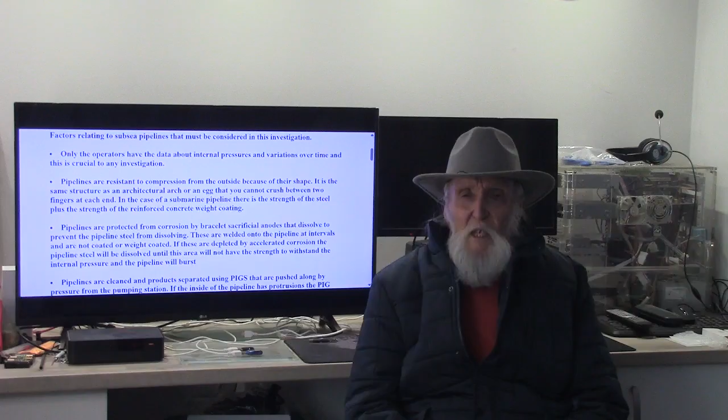Pipelines are resistant to compression from outside because of their shape. It is the same structure as an architectural arch or an egg that you cannot crush between two fingers at each end. In the case of a submarine pipeline, there is the strength of the steel plus the strength of the reinforced concrete weight coating.

Pipelines are protected from corrosion by bracelet sacrificial anodes that dissolve to prevent the pipeline steel from dissolving. These are welded onto the pipeline at intervals and are not coated or weight coated. If these are depleted by accelerated corrosion, the pipeline steel will be dissolved until this area will not have the strength to withstand the internal pressure and the pipeline will burst.

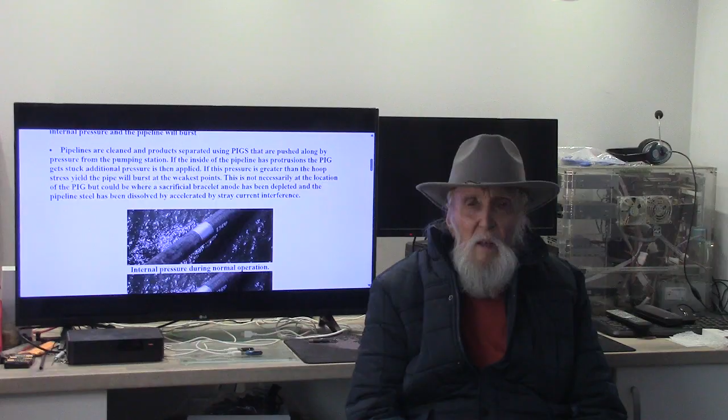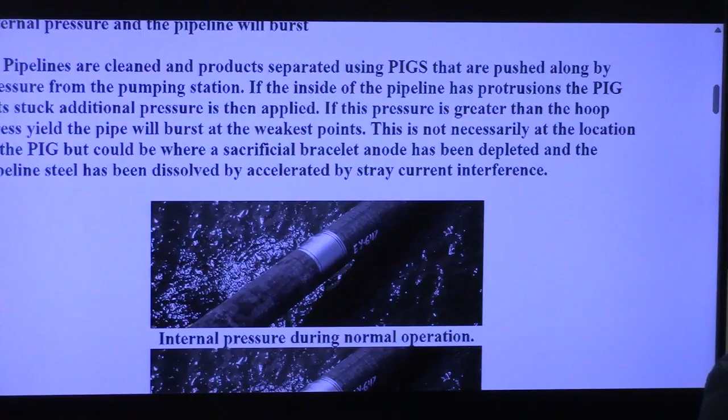Pipelines are cleaned and products separated using pigs that are pushed along by pressure from the pumping station. If the inside of the pipeline has protrusions, the pig gets stuck and additional pressure is then applied. If this pressure is greater than the hoop stress yield of the pipe, it will burst at the weakest points.

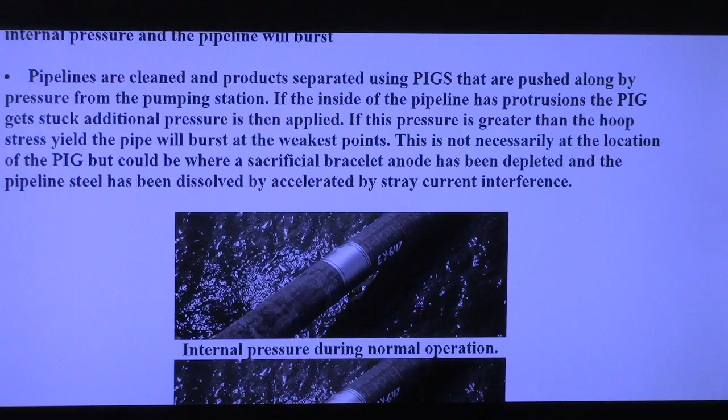This is not necessarily at the location of the pig, but could be where a sacrificial anode, bracelet anode, has been depleted and the pipeline steel has been dissolved by accelerated stray current interference. These pictures show the sequence of these events.

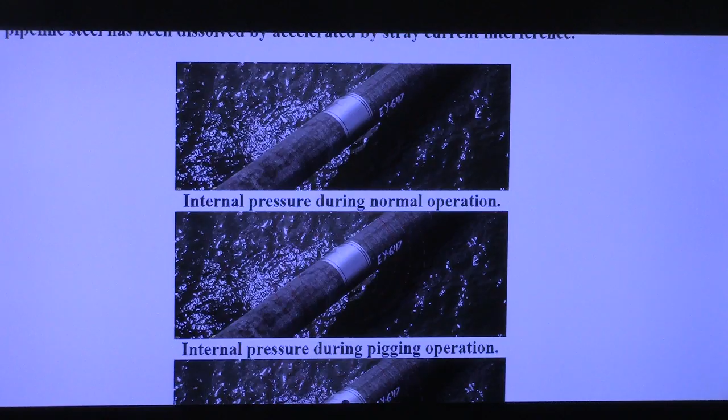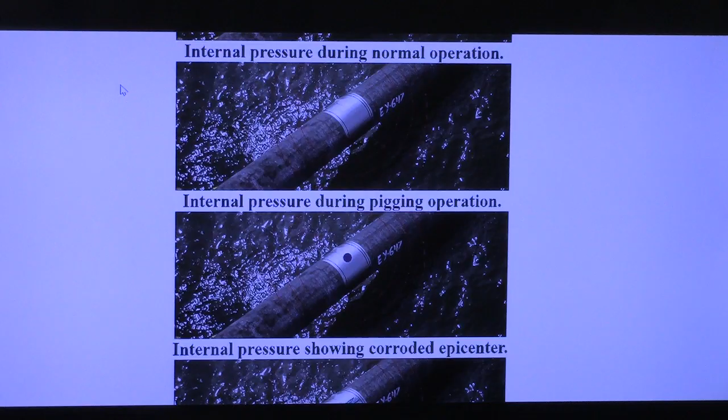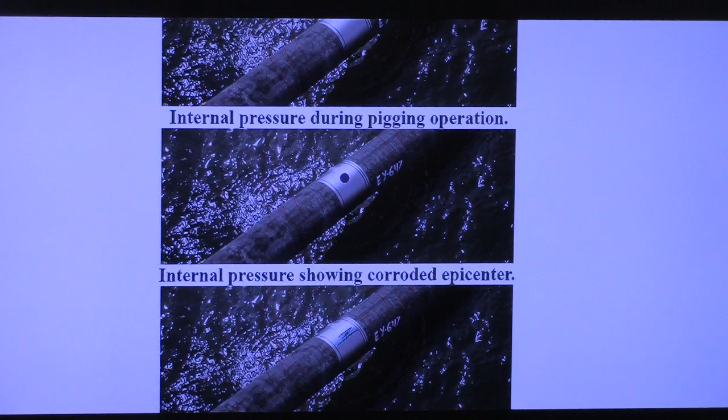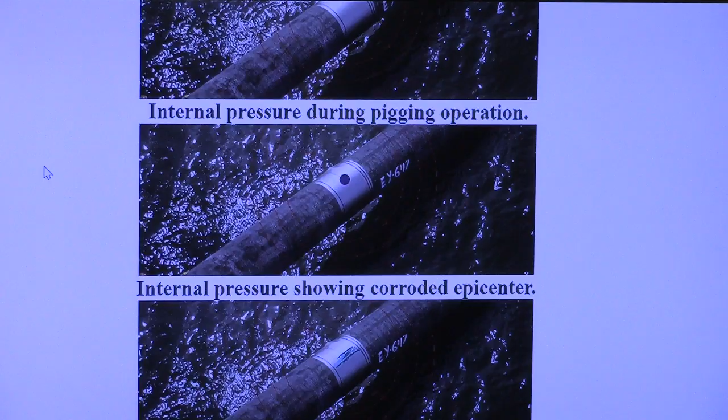The internal pressure during normal operation hasn't affected this particular picture. The internal pressure during normal operation is shown by the red rings, which show the amount of pressure. The internal pressure during a pigging operation is exerting more stress to the weakened part of the steel under the neoprene coating that you can see in the picture.

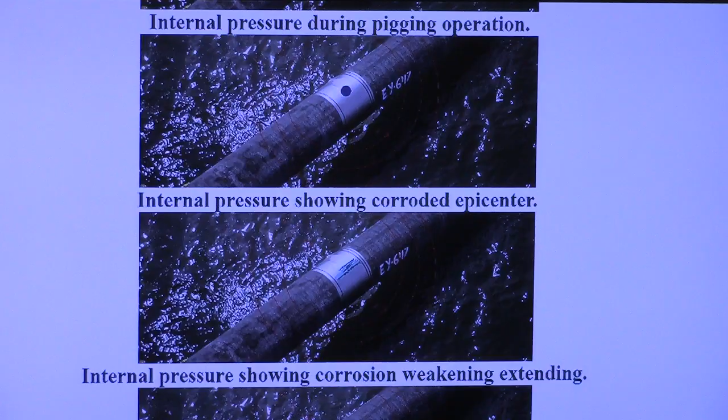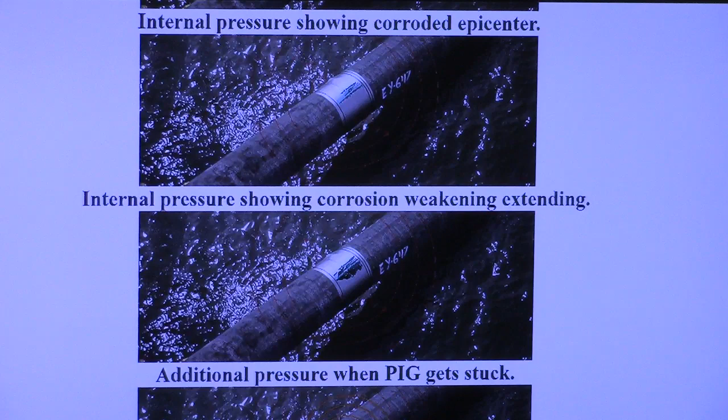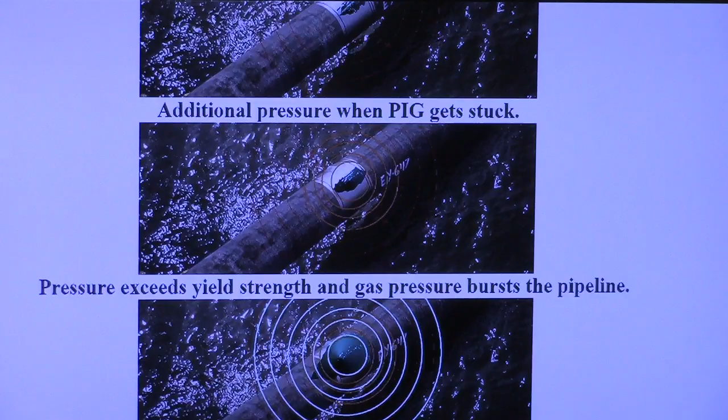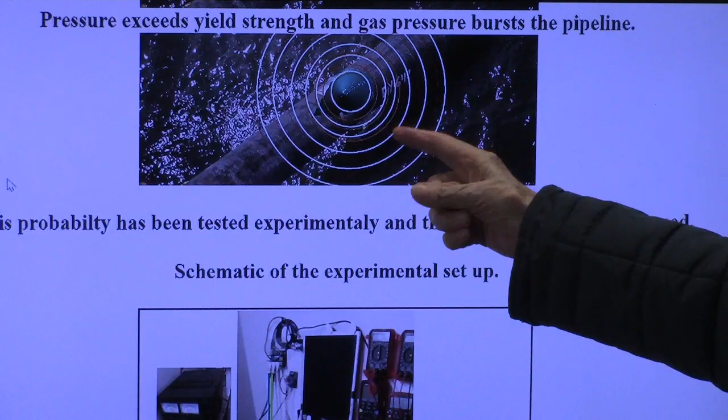Internal pressure showing corroded epicenter. And then the next picture, the internal pressure showing corrosion weakening, extending, so gradually the steel is stretching. Additional pressure when the pig gets stuck. And then the final one is the pressure exceeds the yield strength and the gas pressure bursts the pipeline. This is shown by these circles that I've actually photoshopped onto here.

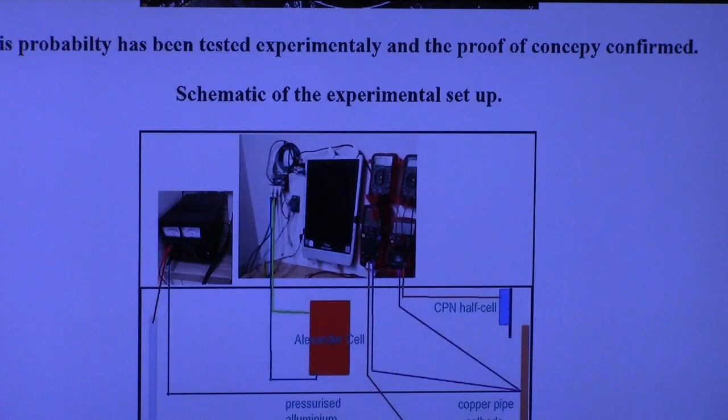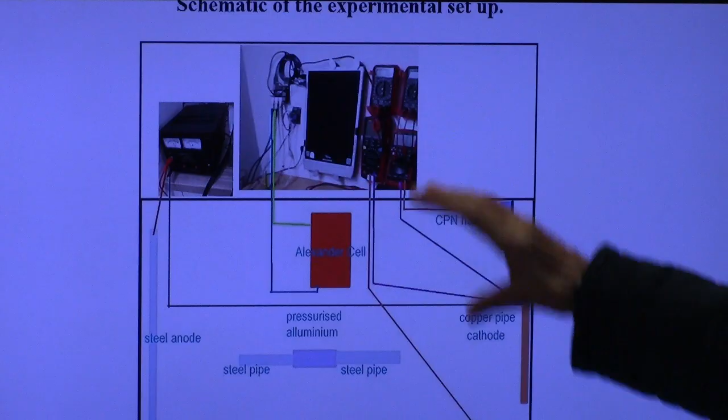This probability has been tested experimentally and the proof of concept confirmed. Here is a schematic of the experimental setup. We have the transformer rectifier, the instrumentations, and then the schematic of the layout of the experiment itself.

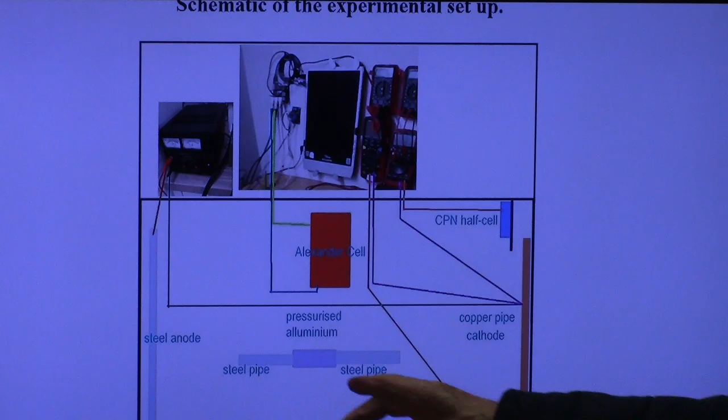There's a steel anode from which the charges are coming through the test piece with the steel pipe with the aluminium pressurised in the centre, and this is the copper cathode that I've inserted, and to prove the current flow, a steel nail here and a steel nail here, and this is the roving CPN half cell, which is the probe.

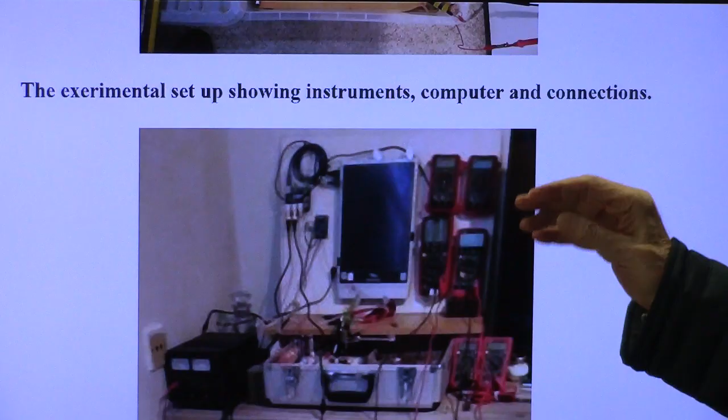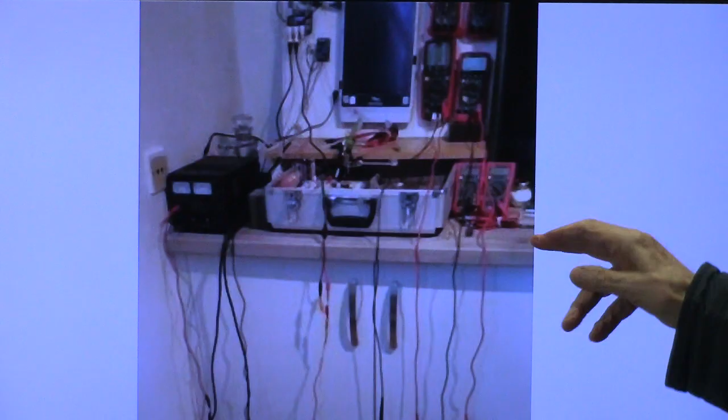The next picture shows the instrumentation and computer connections. This is a computer which is connected to the oscilloscope, which is there. These are recording voltmeters, and these are ammeters. This is the transformer rectifier, and this is part of the equipment where the connections are made through.

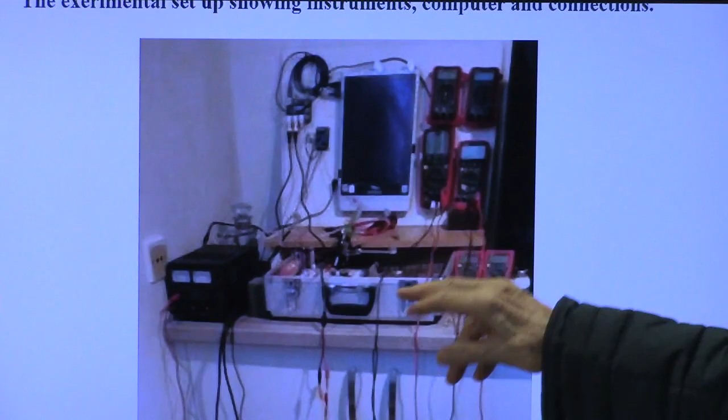If you scroll down, you can see the connections to the actual test bed itself, and this is the Alexander cell, the test piece, and the probes. This one, that's a fixed probe, and this one is the roving probe which will be moved along.

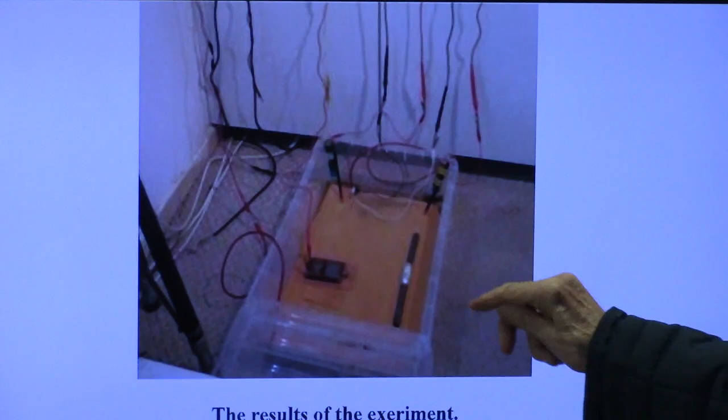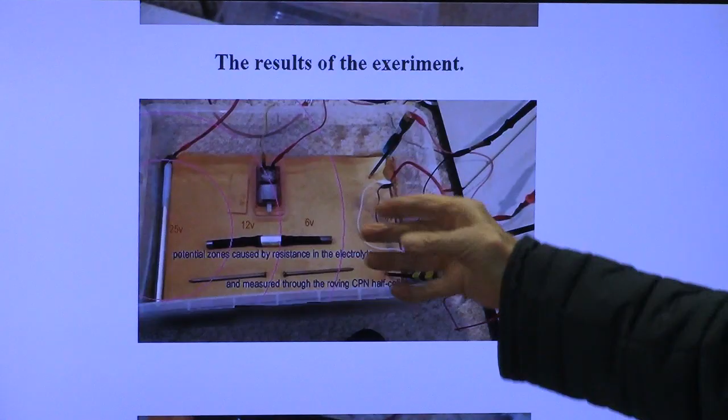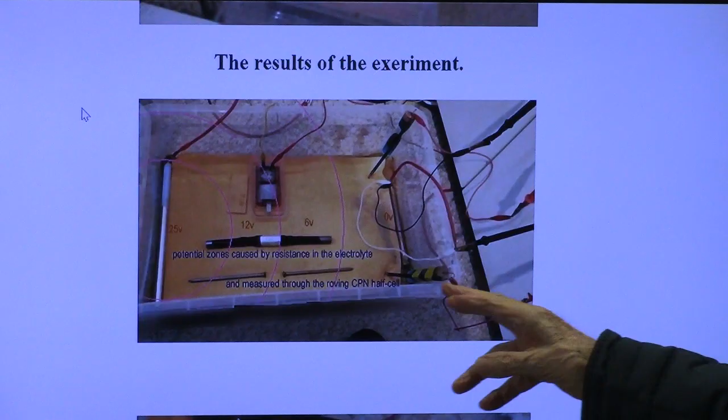Now we can see the results of the experiment, which is shown here, and the potential zones caused by the resistance of the electrolyte, which is impregnated into the cloth on which everything is standing, and measured through the roving CPN half cell, that specialised probe that we've designed.

Now, to see the real results, this is what happened to that, which is a photograph, a real photograph. This is the result of the accelerated corrosion which burst the actual pressure vessel in here. Here is the pressure vessel, how we set it up. This is the current coming through here, into there, through here, out to there.

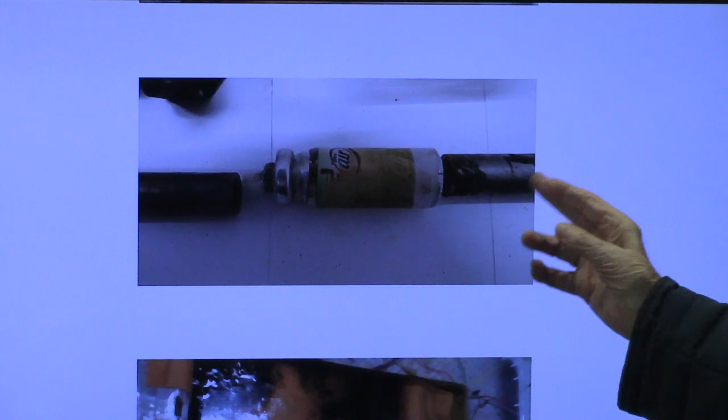And this shows the actual result. This has actually burst, and in the video you can see the bubbles come out and the effect of the explosion. There are many hundreds more pictures, time-stamped and dated, as well as videos of the complete experiment, including the explosion of the capsule.